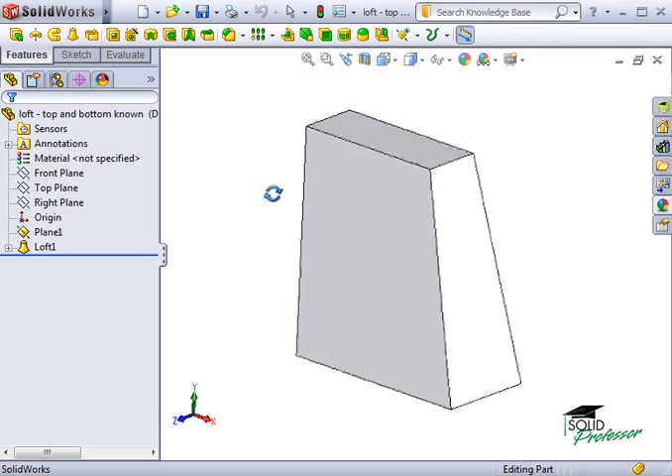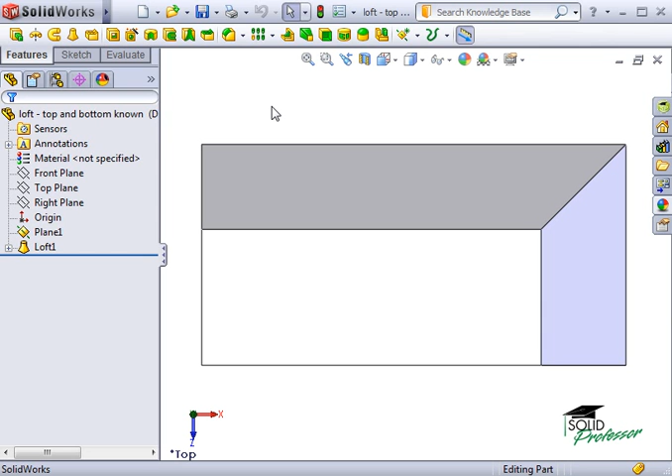At first glance, you might wonder why a loft is even necessary. After all, the parts look pretty simple, there are no complex surfaces, so why bother using a loft? Take a look at the top view. Notice the different size profiles at the base and at the top. If you know the size of the base and the size of the top, but you don't necessarily care about the angles of these two faces, then a loft is ideal for the situation. Let's begin a new part and see why this is the case.

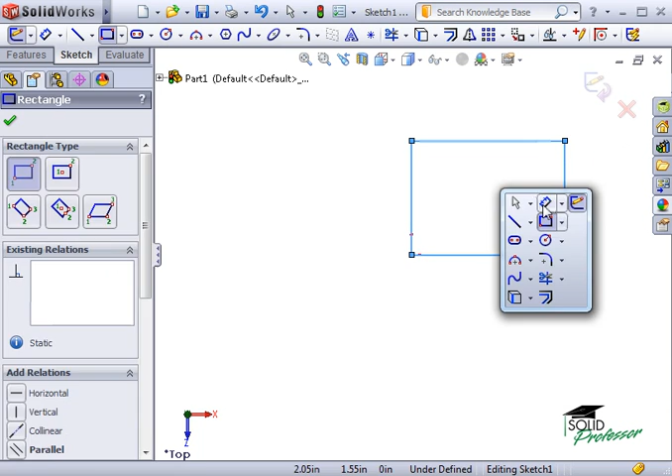Here I have a new part file. The first sketch will be on the top plane. This will be a simple rectangle that will serve as the base profile for our loft. I'll dimension the rectangle to be 5 inches by 2.5 inches. This is all the information I need for this profile, so I'll exit the sketch.

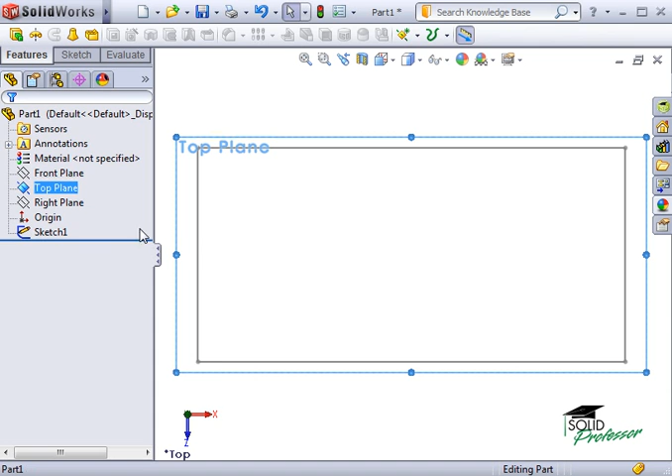Next, I'll create a sketch that will define the top of the loft. The top of the loft is going to be located some distance above the base sketch. In order to create that sketch, I'm going to need a plane located 6 inches above the top plane. I'll create a new plane using the top plane as a reference and specify 6 inches as the offset distance. Now I'm ready to create the top profile.

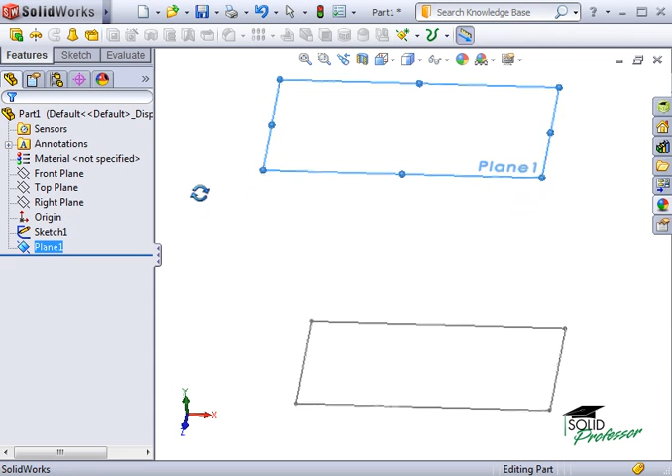By the way, creating lofts will often require that you create reference planes. If you don't feel comfortable with the various methods of creating planes, take a moment to review the topic in the SOLIDWORKS online help. I'll begin a sketch here on my newly created plane, and I'll define a rectangle 4 inches by 2 inches.

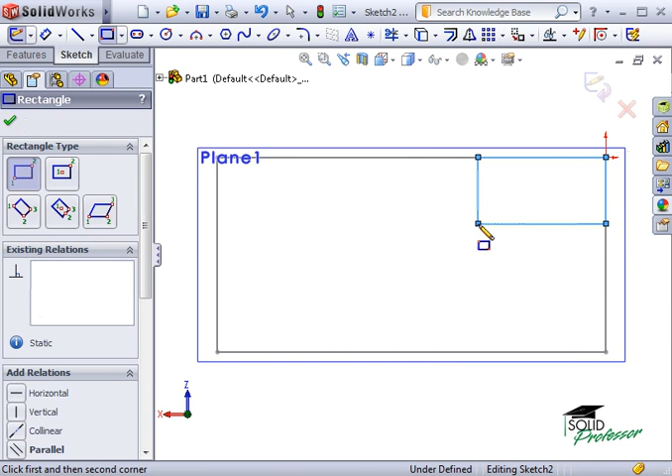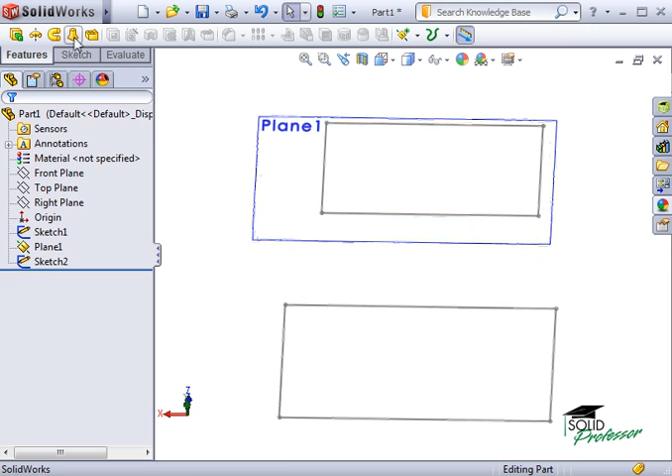At this point, I'll exit the sketch and select the loft icon. The Loft Property Manager appears. The Profile selection window is active and ready for me to select the profiles that will define the loft. I'll need to select 2 or more profiles to define a loft.

As with most features, I can either select the items I need from the Feature Manager tree or from the Graphics window. When using a loft, I strongly recommend selecting your profiles from the Graphics window. Here's why. The Loft feature is sensitive to the location where you select each profile. I'll select the base profile close to this corner, and I'll select the top profile near the corresponding corner.

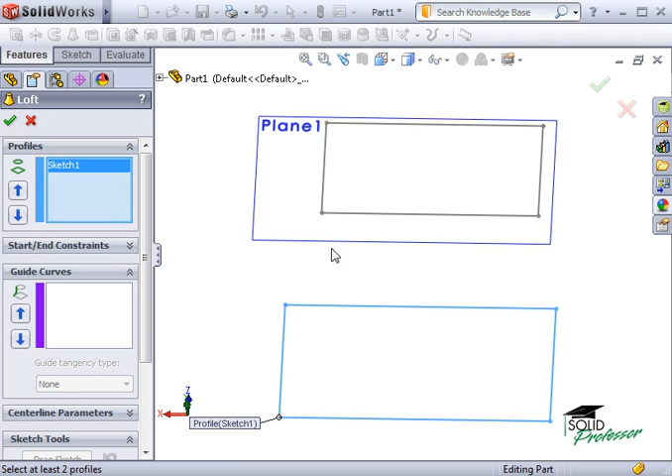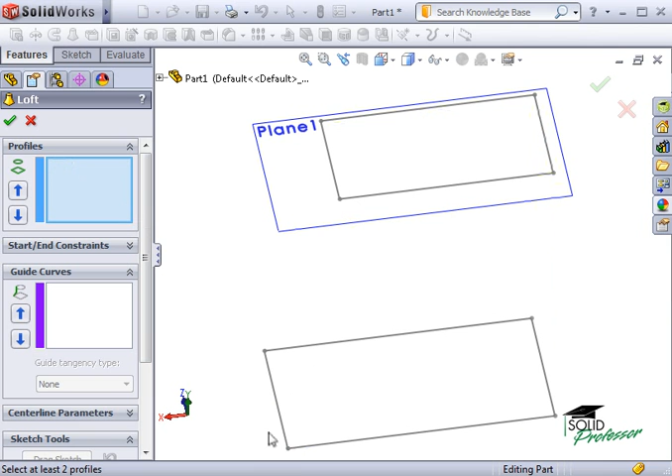A preview immediately appears, as well as these green dots called connectors. The reason these connectors join these specific corners of the profiles is because of where I clicked. To make this clear, let me right-click in the Profile selection window and select Clear Selections. Now, I'll repeat the selection process, but this time, I'll click the profiles near opposite corners. Notice the drastically different result?

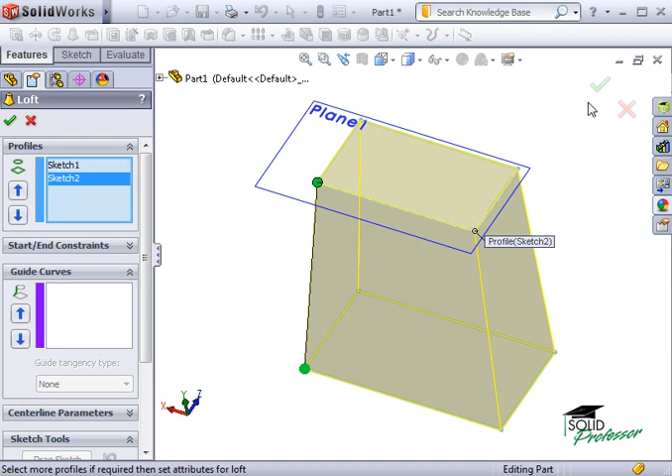For this reason, you'll want to be careful about where you select your profiles. However, if you do happen to make a mistake, you can click and drag the connector dots from one corner to another and fix any unwanted twisting. At this point, I'll click OK, and the loft is complete. The dimensions of the base and top profiles have been defined, as well as the overall height of the part, and the loft has taken care of everything in between. This is exactly what I was looking to accomplish.